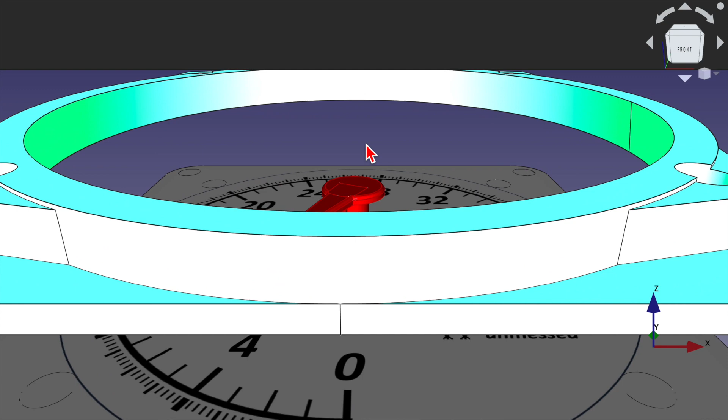Guys, today there is another nice case to build yourself. All construction plans and the Arduino code were discussed on the channel and made available for download.

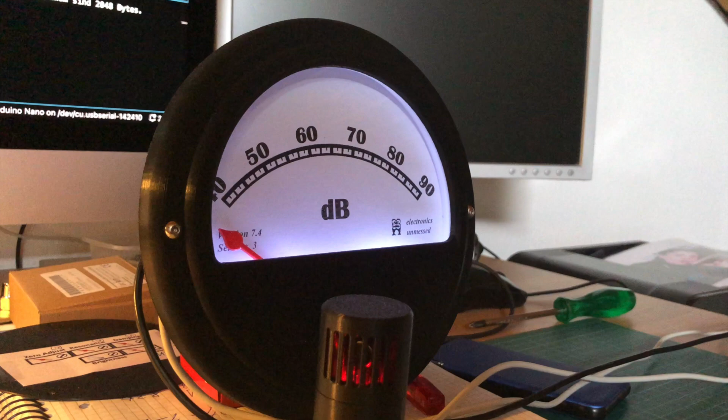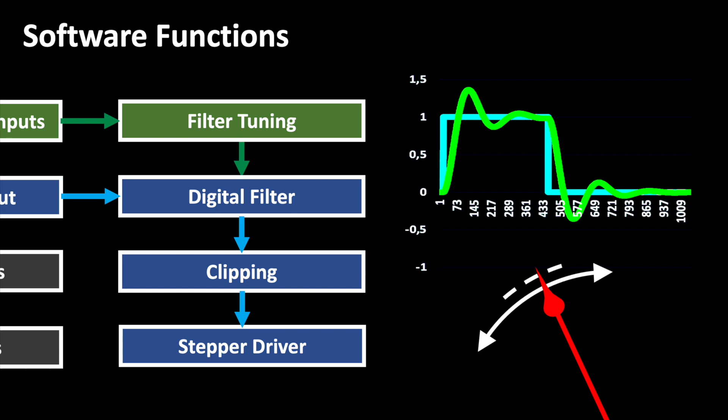In previous videos I have shown the construction of a retro design gauge. Not only the look is retro, but also the control of the pointer, which can imitate the dynamics of a classic pointer instrument. I find small stepper motors very interesting for maker projects. That's why I developed a universal hardware design that can be used to implement multiple functions. For this project I'm applying that hardware. I linked the previous videos.

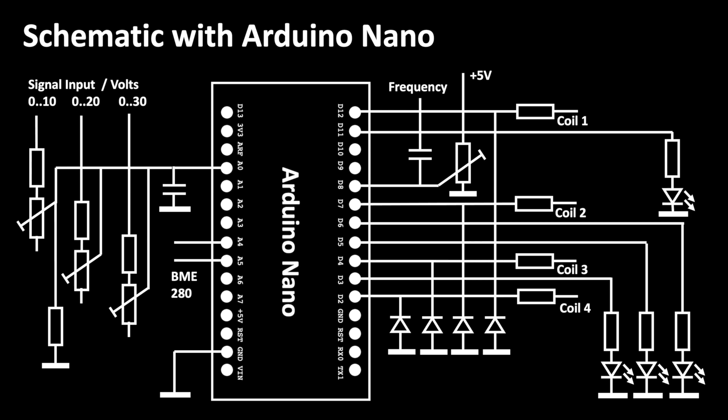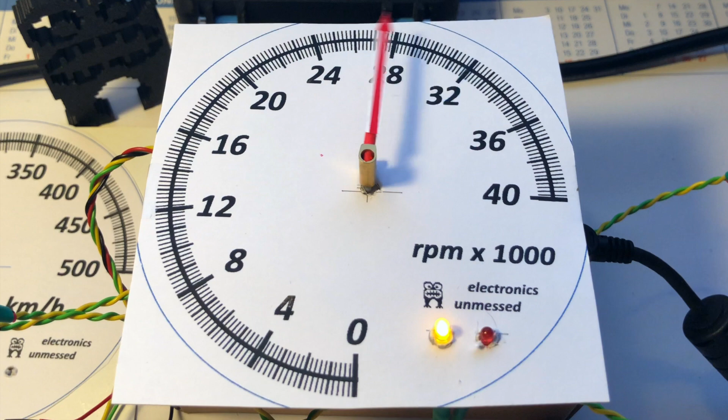And this time I'm aiming for a fast reacting gauge instead of a sluggish retro looking instrument. We need to accelerate and decelerate our stepper motor to get it to spin at its maximum speed. This is achieved with the right code, which I've been experimenting with for a while. If you're interested in the details, check out the previous videos.

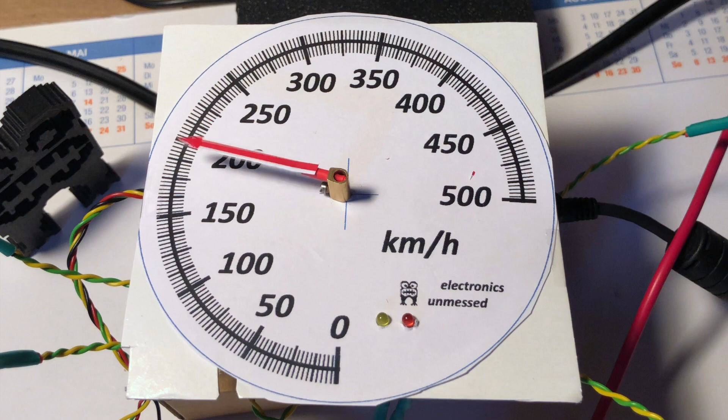As you can see, I've already designed a dial for a rev counter and a speedometer. I also provide the two dials as a PDF file. A housing in the style of a classic sports car rev counter would of course be cool for this. That was my basic idea, which I immediately try to capture with a hand sketch. That way I can get a feeling of the dimensions and the style elements.

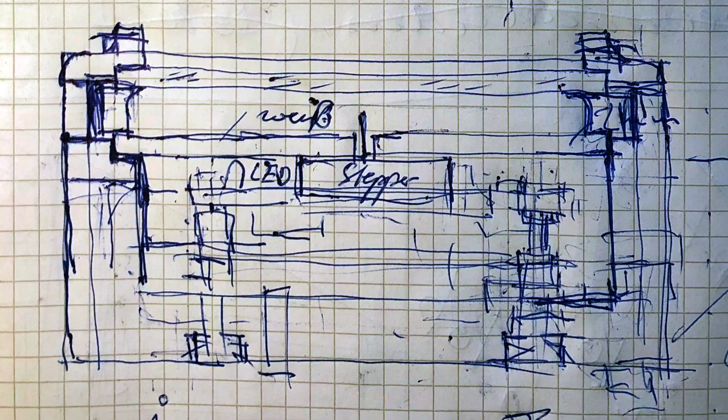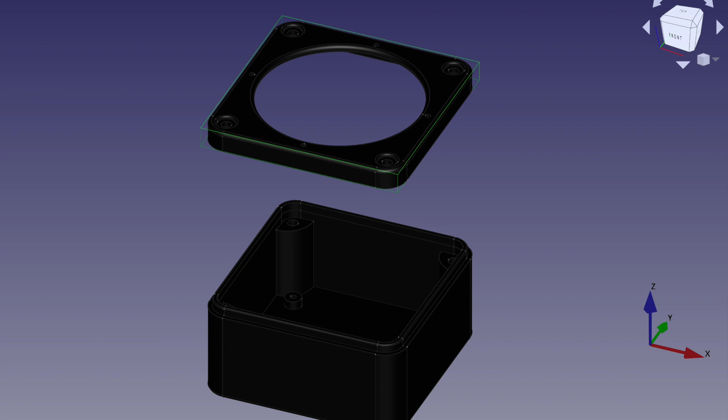In the meantime, I developed my FreeCAD skills further. And that makes it even more fun for me to construct things for 3D printing. The new housing consists of two parts that are held together by four 70 mm long M6 screws. Inside we have a plate for the dial and of course a pointer.

And then we have a white body illuminated by four white LEDs. The LEDs are inserted into these holes from below. The light is diffused by the white PLA material and then illuminates the dial.

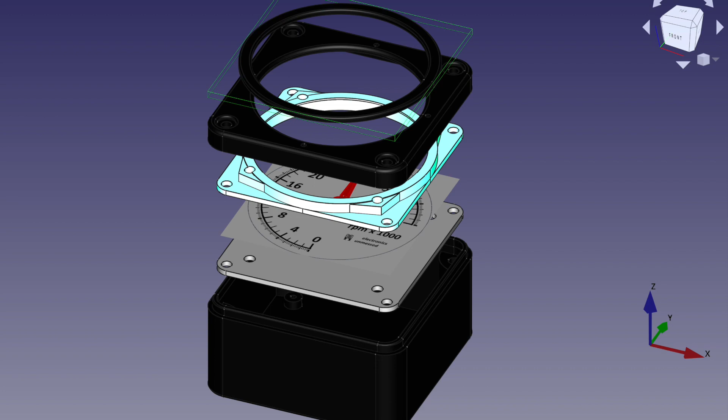For the front I created an anti-glare ring, which is positioned with studs and later glued. With this trick I get a nice surface structure on the front panel and on the anti-glare ring. Experts know the problem. It's hard to get a nice finish with offset surfaces. An acrylic glass pane with a diameter of 10 cm is embedded in the front of the housing.

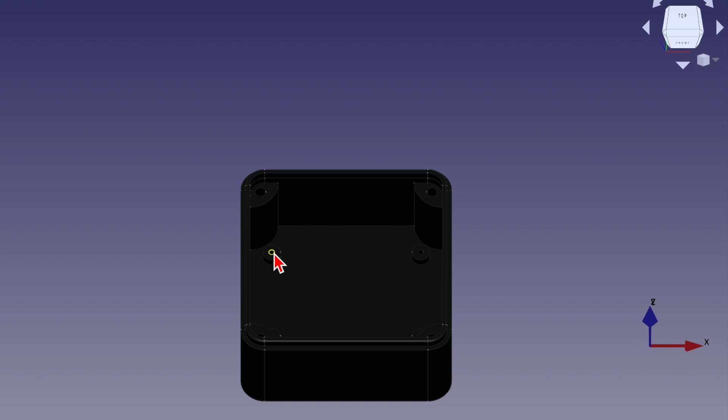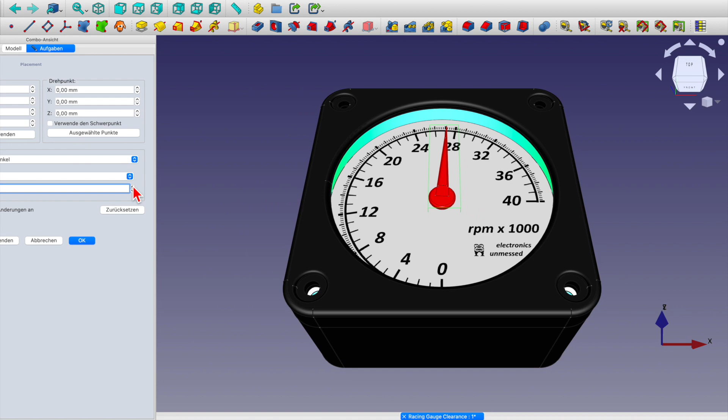The body is prepared to mount two boards on top of each other with 50 mm long M3 screws. This allows the position of the two circuit boards to be varied a bit, for example if you want to use a different stepper motor. I provide all files in FreeCAD format and as STL format. And here's a little trick to create realistic animations in FreeCAD. I use the placement function to rotate the pointer.

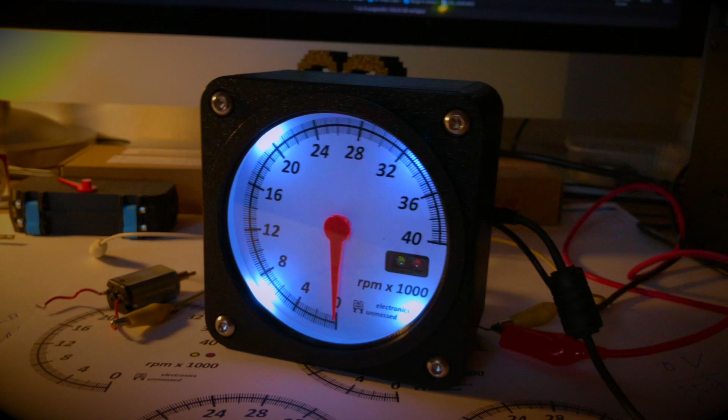And this is what the device looks like when it's finished. That's cool, isn't it? And the thing works really great. I calibrated the voltage divider for the voltage measurement with my multimeter and a laboratory power supply.

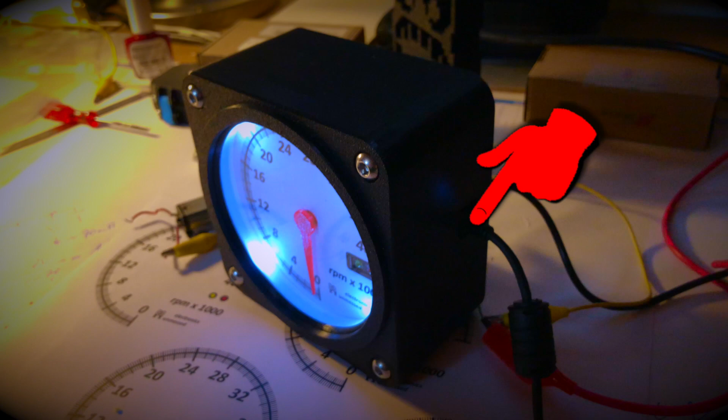By the way, assembly was easy. I left a hole on the side so that the USB port remains accessible, because I don't want to open the device every time when I want to change the code. Also, I can then power the device from a USB charger or a PC. The electrical connections are on the back. I use Lustre terminals for that.

And yes, the thing is really damn fast, at least for a mechanical gauge. And that's why I said to myself, I absolutely have to test the instrument together with a slot car racetrack. And what's next? I will do more experiments based on frequency measurement and sensors. There are a number of new projects on my mind applying the concept.